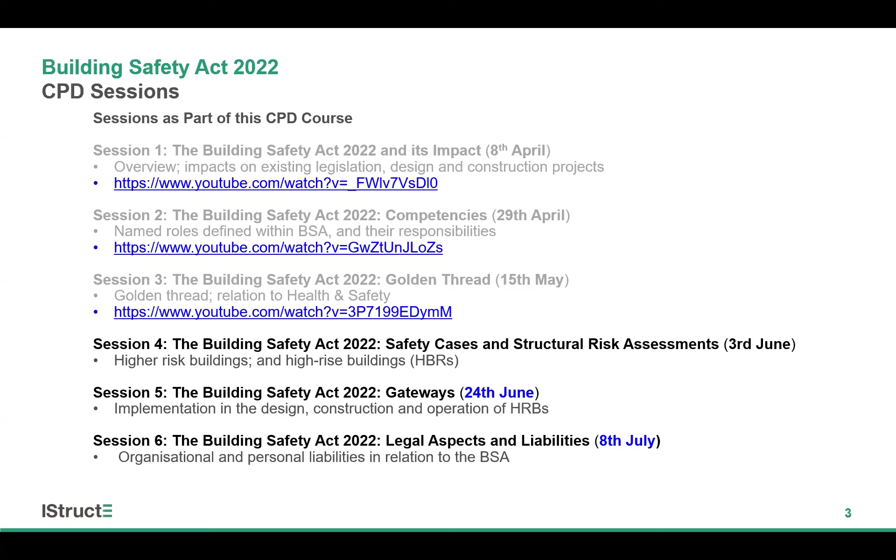Thank you. Okay, hi everyone. So my name is David Rivers. I'm a partner with Cundall. I've been working on structural risk assessments for the best part of 9 months now, so I'm going to hopefully catch you up to where we've got to in terms of understanding.

The plan for today's session: we're going to first have a general introduction. We'll cover the legislative requirements and a bit more about what the safety case report is, the bits that make it up, and what the act itself requires. I'll then give you an overview of the forthcoming IStructE Guidance on structural risk assessments, talk a bit about data gathering and how we get hold of information for desktop and visual inspection, then talk about the actual structural risk assessment process itself. There'll be hopefully a bit of time for questions at the end, although there's quite a bit to get through.

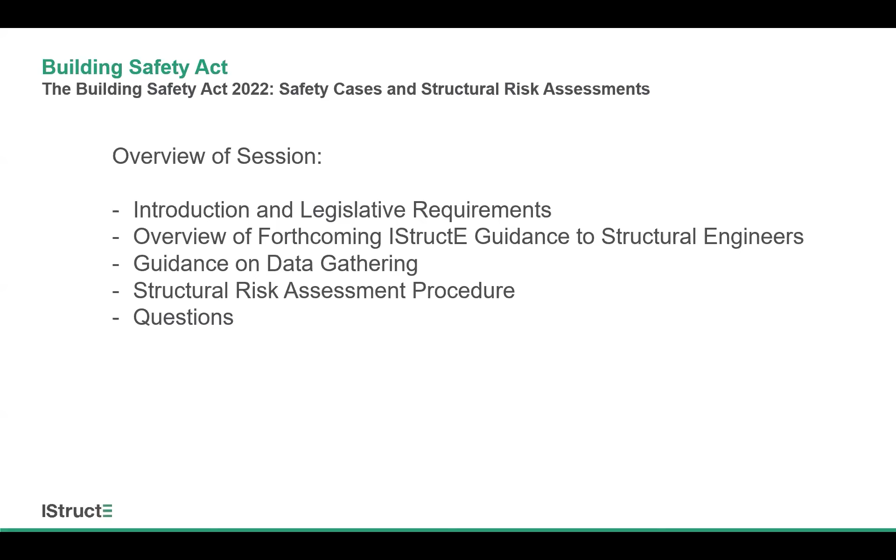So first things first, an introduction to the safety case report. The need for the safety case report and generally safety risk reporting is obviously a direct result of the Building Safety Act coming in. That mandates that for all new and existing higher risk buildings, and I'll get a bit further into what that means in practice in a couple of slides.

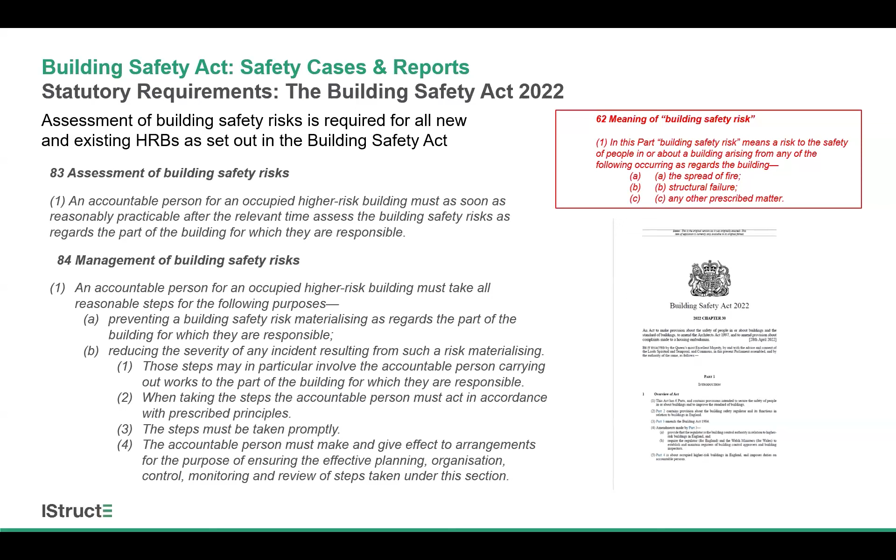For all such buildings, they need to have an assessment of their safety risks, and that's primarily from a structural and a fire perspective. The Act itself picks this up as part of clauses 83 and 84, which broadly just note that building owners need to carry out an assessment and manage safety risks on their properties.

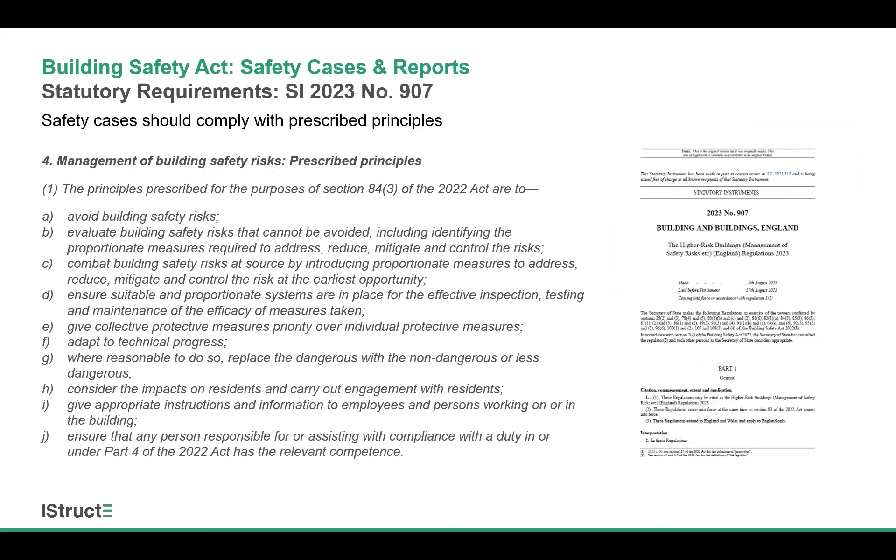It's statutory instrument 907 that more specifically elaborates as to what that means. So that sets out what it's called the prescribed principles in terms of that risk assessment process - identifying building safety risks and then managing them in a suitable way. And it's the same statutory instrument that then actually explicitly introduces the safety case report as a means to do so.

So broadly, that identifies that the person who's responsible for the building, the principal accountable person, has to work through a process to show that they understand their building and how it operates and any safety risks associated with it. That's obviously the kind of pure legislation.

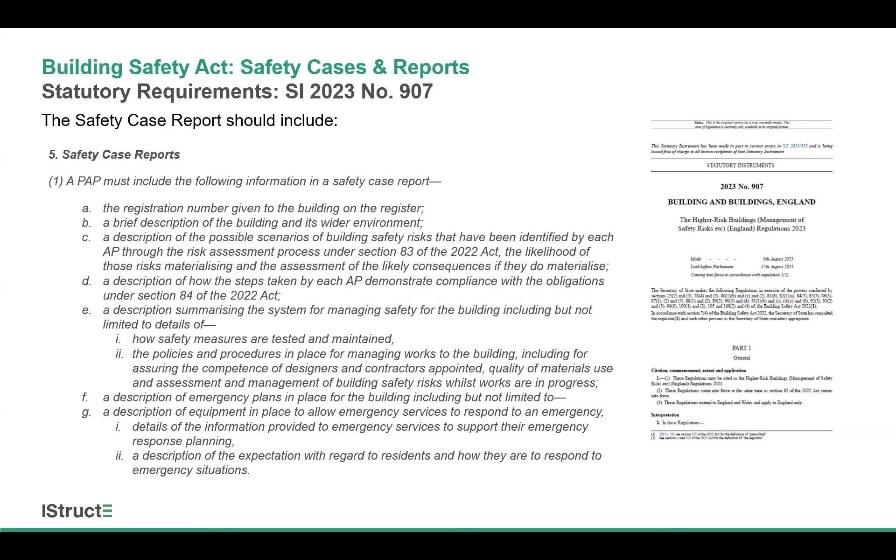What the HSE have done is on their gov.uk website, they've given a slightly more user-friendly interpretation of what actually goes into a safety case report and what principal accountable people need to do. This is as per the website reference in the bottom right. It's a very useful resource, there's a lot of content in there. I'm not going to go through all of it, but I'll pick out some key points to help set the scene and provide context as to what the safety case report is looking to achieve in a wider sense, to then help contextualize what we as structural engineers will generally need to feed into that process.

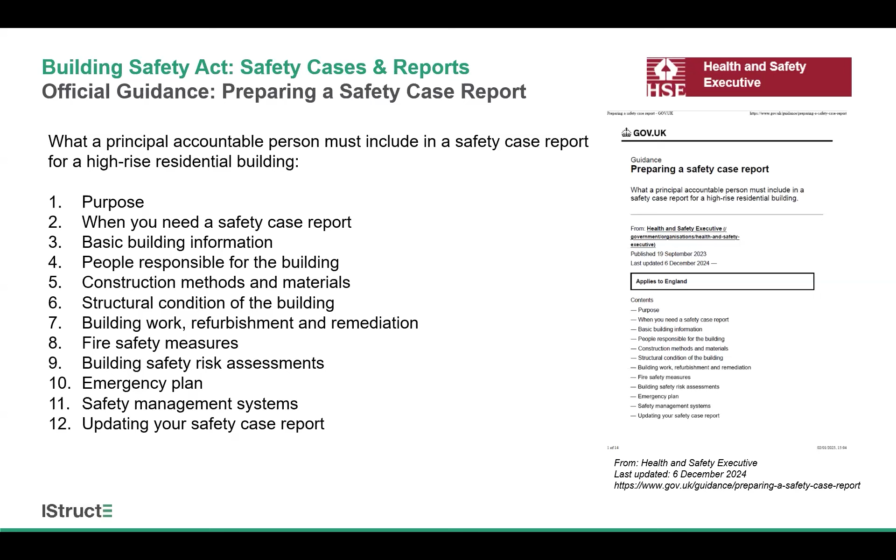First things first, the purpose of the safety case report is fundamentally to set out building safety risks associated with high-rise residential buildings and how they're managed. The definition of a high-rise building is broadly 7 stories or at least 18 meters high, and containing 2 residential units. I'll talk a bit more about that in a second. As mentioned, it's primarily looking at safety risks associated with the spread of fire or smoke and with structural failure of the building. There's obviously a degree of overlap between the two as well, which we'll talk about later.

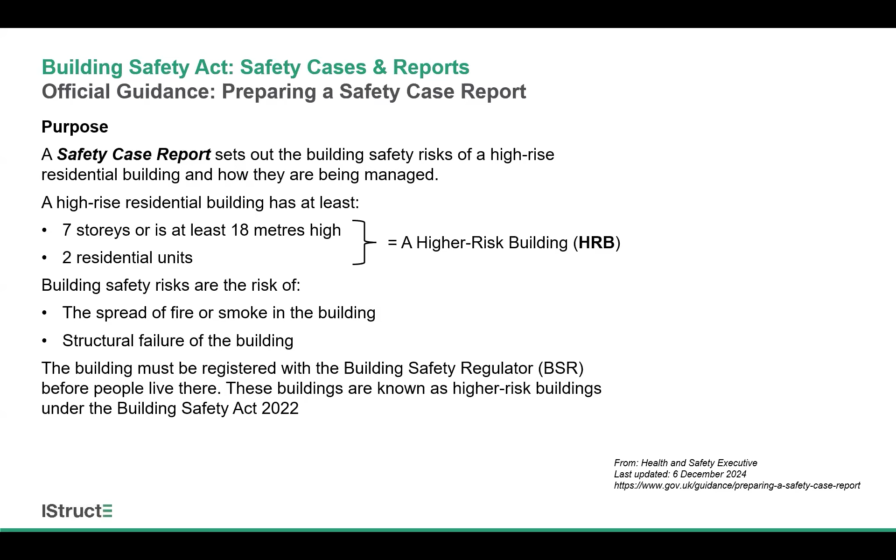Any such buildings must be registered with the building safety regulator, the BSR, before people can live there. So it applies to all buildings, even new build higher-risk buildings - before they can actually be occupied and used, they need to have a safety case in place. Obviously, the difference there is that if you've just designed and built the building, the information hopefully is readily to hand. Whereas if it's a building that was built 10, 15 years ago, that may not be quite a straightforward process.

In terms of the HRB definition, the gov.uk website that I referenced goes into an awful lot of detail to help you define what is a higher risk building, and to help principal accountable people identify whether their buildings qualify or not. In basic terms, as I mentioned, it's a 7-story building or a building that's at least 18 meters high, and that height is measured from the ground level to the top occupied floor. So if you've got a rooftop plant room or a green roof etc., that doesn't necessarily count. There are all sorts of nuances within there - if the ground level varies, or if you have local occupied rooms and things, then there's a lot more guidance on the website. Again, a good place to look if you're trying to clarify.

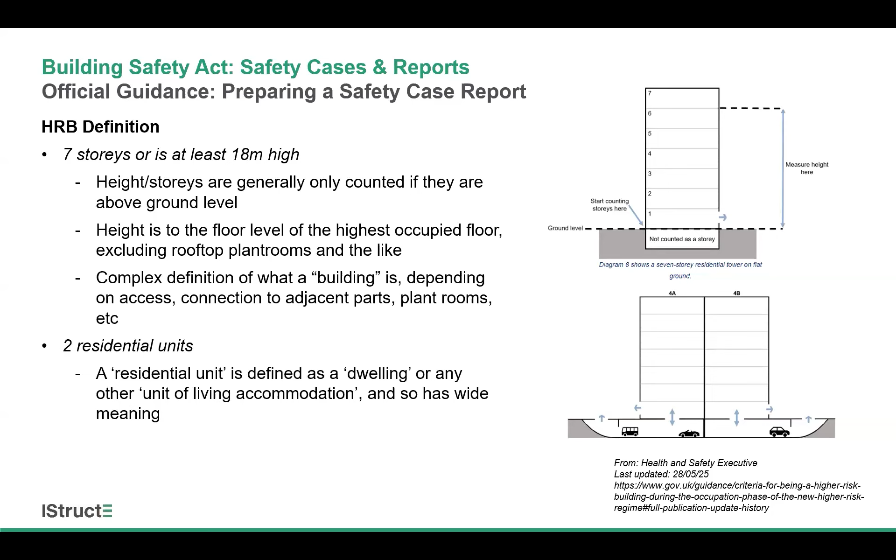In terms of the definition of a residential unit, it's I think deliberately a quite broad definition - it's a dwelling or any other unit of living accommodation. There's a bit more explanation on the website, but it's, I think, deliberately vague to make sure that more buildings are included, certainly buildings where people will be there overnight and therefore at risk of any issues occurring.

There are some exclusions that are noted explicitly within the guidance. So if the entire building is used for one of the following uses - a hospital, care home, a secure residential institution such as a prison, hotels and hostels, or military barracks - those fall outside, as long as the entirety of the building is used for that purpose. If you have, for example, a hotel where the top 2 stories are actually residential units, then that would still qualify as a high risk building.

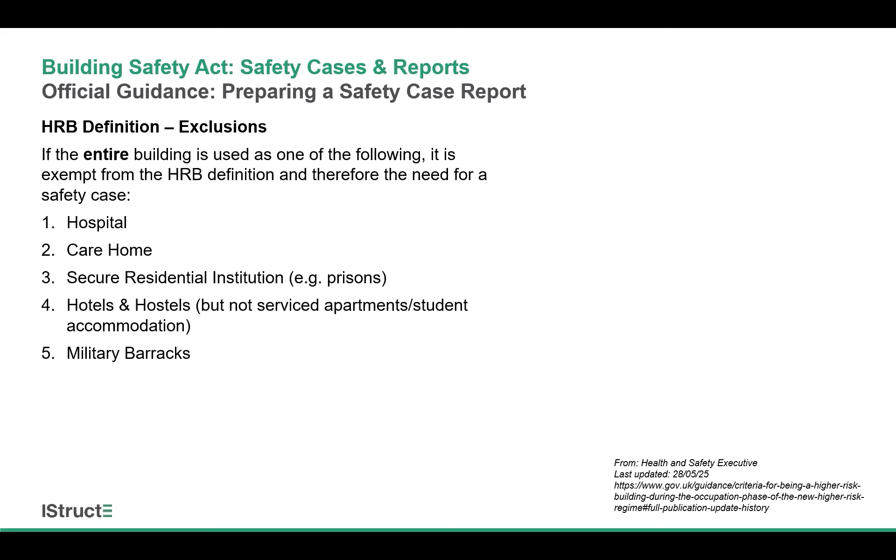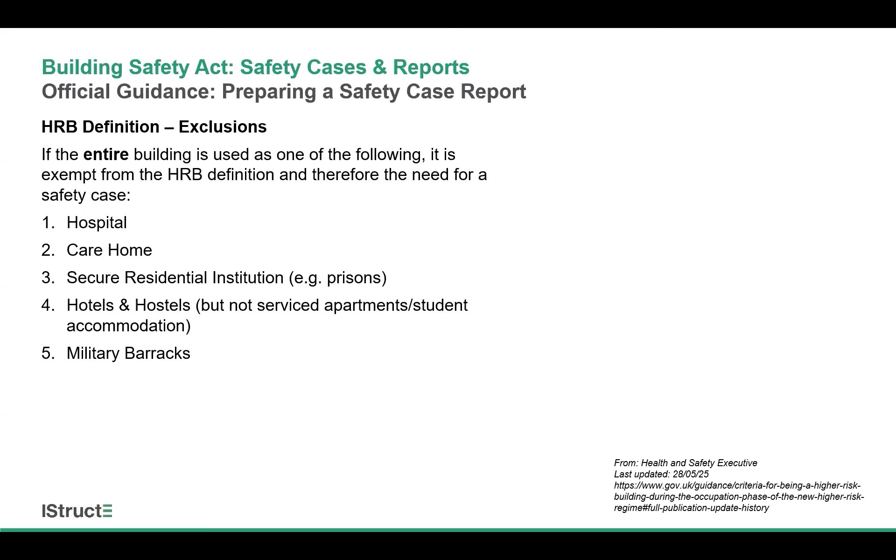Broadly, the logic is that these are kind of more actively managed facilities. So if you've got a hotel, for example, you'll have a concierge, you'll have a full evacuation plan for residents, and people obviously go to a hotel expecting there to be a fire escape strategy. If it's a prison, you'll obviously have active supervision of inmates etc. In a residential unit, because people live there, it's generally maybe a bit more free form, which I think is why those are treated differently.

When is a safety case needed? As I mentioned, that's needed from the second that a new building becomes - or before people can move into - a new high risk building. Alternatively, if it's an existing building, you need to have one as soon as the regulator calls for it, or as soon as you become the PAP if you're taking ownership of an existing building.

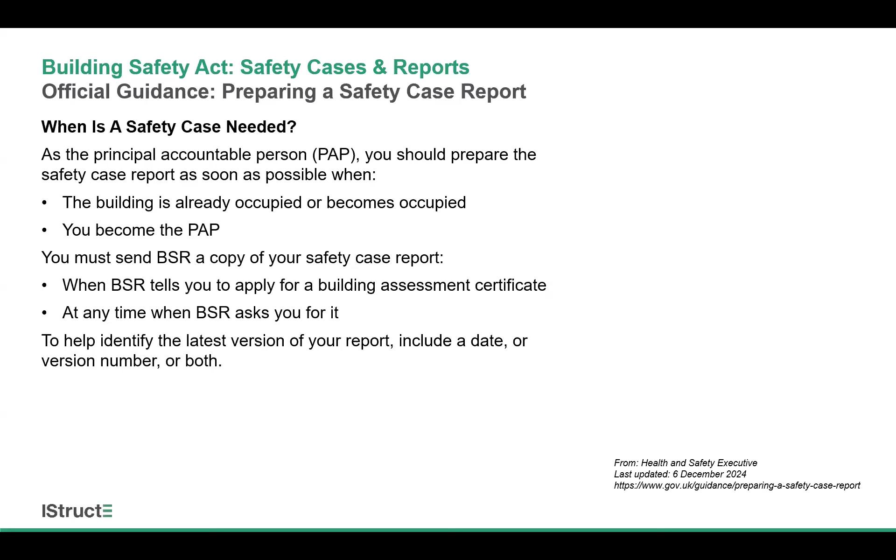The plan is that these risk assessments and safety case reports are updated on a 5-yearly basis, is the current plan. So it's an ongoing maintenance and update process through the life of the building.

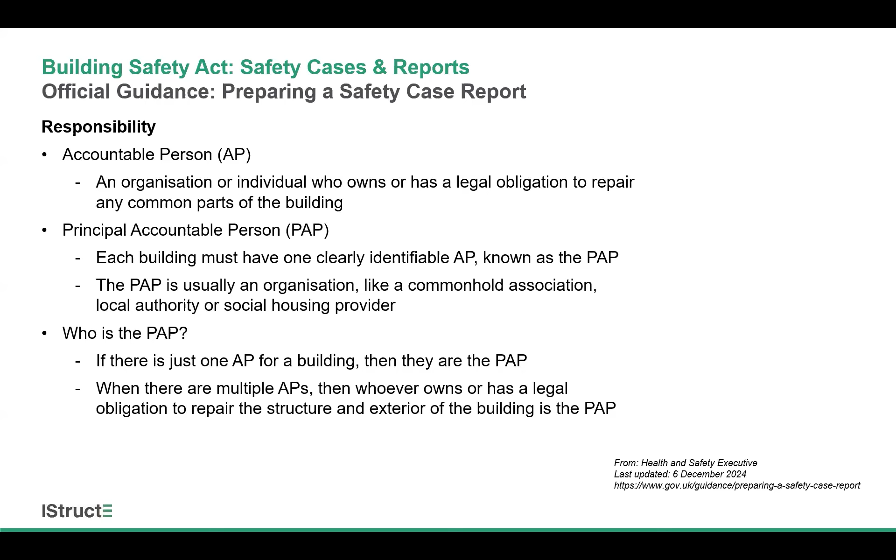I've mentioned principal accountable persons already. Broadly speaking, any accountable person is someone who has a legal obligation to repair or look after a part of the building. The principal accountable person is the overriding person in control. It's usually an organisation, like a commonhold association or a local authority, and they take ultimate responsibility for pulling together the safety case report. They aren't necessarily responsible for producing every single aspect of it, but it's their global responsibility to assemble and submit the safety case and to register the building.

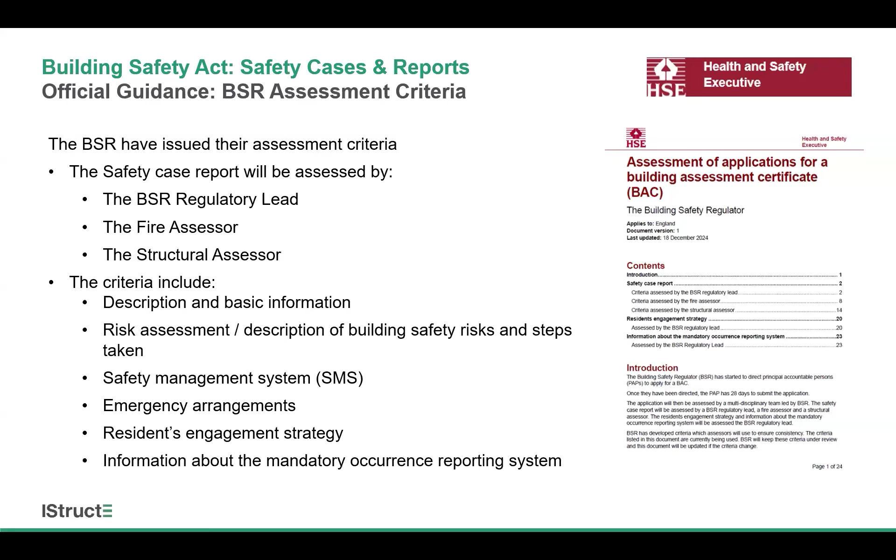As a final introductory note, the BSR relatively recently have published their review criteria that they use for the safety case report reviewing. It's effectively a series of tables that show the areas they're looking for and the questions they're trying to answer. It's quite useful in helping to structure what they're looking for and what level of detail they need. That guidance will continue to evolve over time as they review a larger number of safety case reports and start to find common issues and questions.

Okay, so that kind of sets the scene more from a global safety case report perspective. The remainder of the presentation will focus more specifically on the role of structural engineers and how we feed into that process. I'll start by giving you a quick overview of forthcoming guidance from the IStructE.

So this document, preparing safety case reports, is currently going through final draft and review. The intention currently is for it to be issued in August, and it effectively is the IStructE's perspective on what structural engineers need to do to feed into safety case reports. Normally guidance is based on standards and accepted best practice, but this is all fairly unprecedented in the context of engineering, so it's had a fairly complex development process.

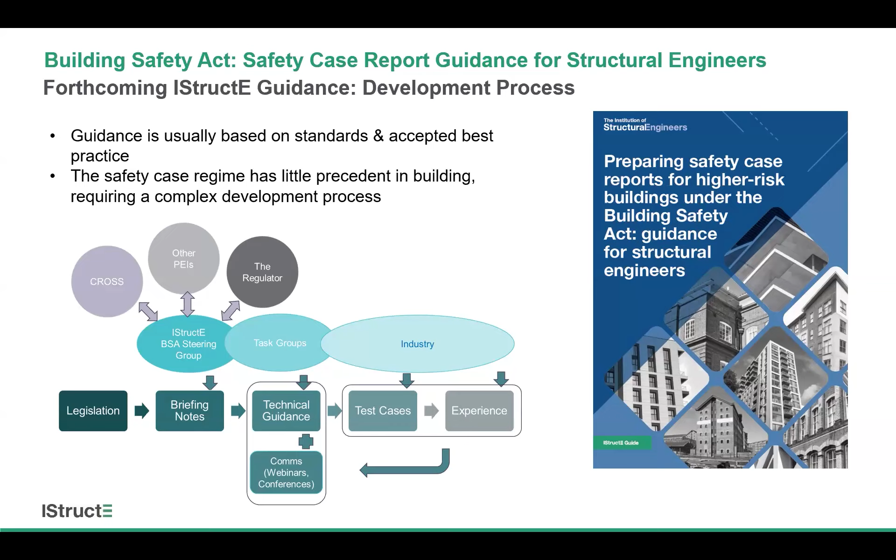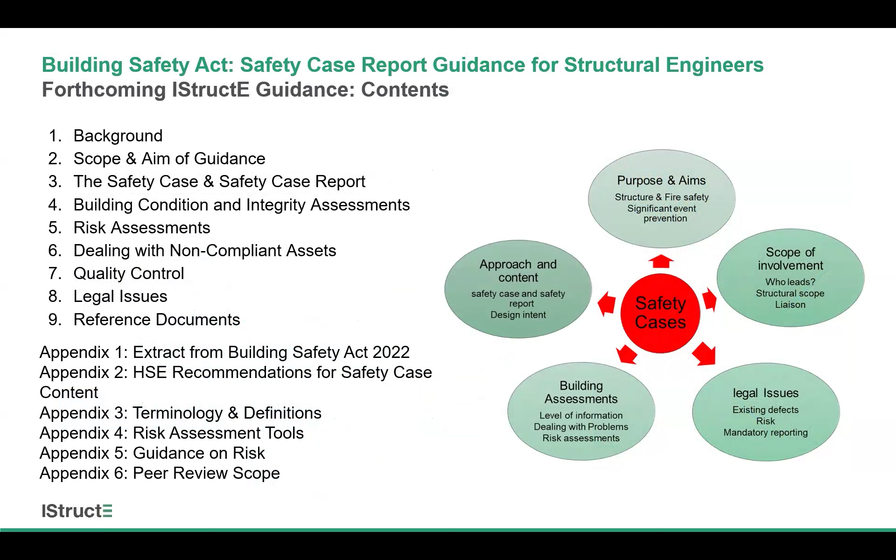There's been various groups feeding in, technical guidance from relevant people, feedback from the industry and the regulator directly as well. So it's been very much a group effort, and it's taken a fair bit of time to pull those various strands together. But the intention is that it will act as a one-stop shop to help steer the process for structural engineers. The document itself works through a logical process of the different steps of that safety case assessment procedure. We will cover a number of these in the coming slides, but this gives you an overview of what's going to be in there.

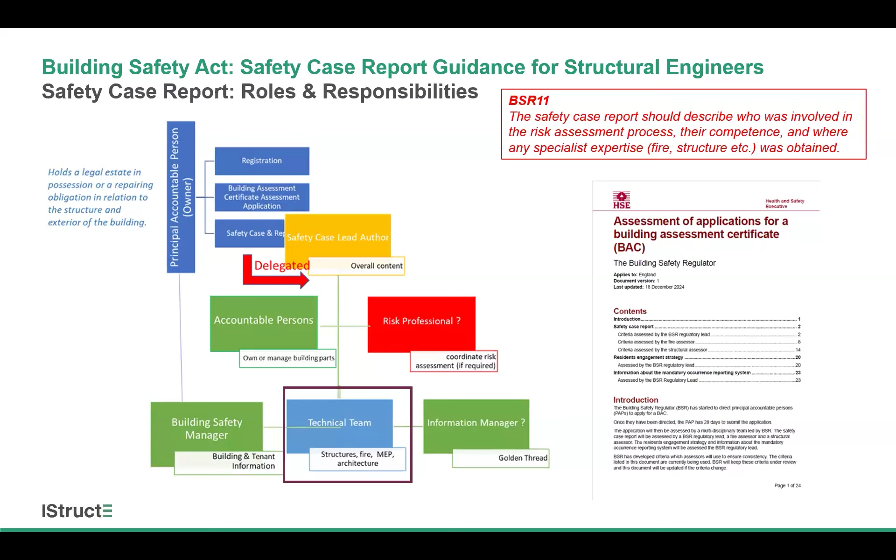In terms of roles and responsibilities, as I've already alluded to, there's a whole number of people who feed into the wider safety case reporting. From a structural engineering perspective, it's generally this purple box at the bottom, the technical team - that's where we will feed in. As mentioned, it's the principal accountable person who is ultimately responsible for putting all of this information together and coordinating the team, and we, as structural engineers, will be providing our information to them.

In terms of what that information would look like, the primary element is the structural risk assessment itself, which I'll talk about further, but there's various other input across the board that will feed both into that risk assessment and more generally into the safety case report. So we have quite a few things to think about, but they all fall under the same general review and assessment process.

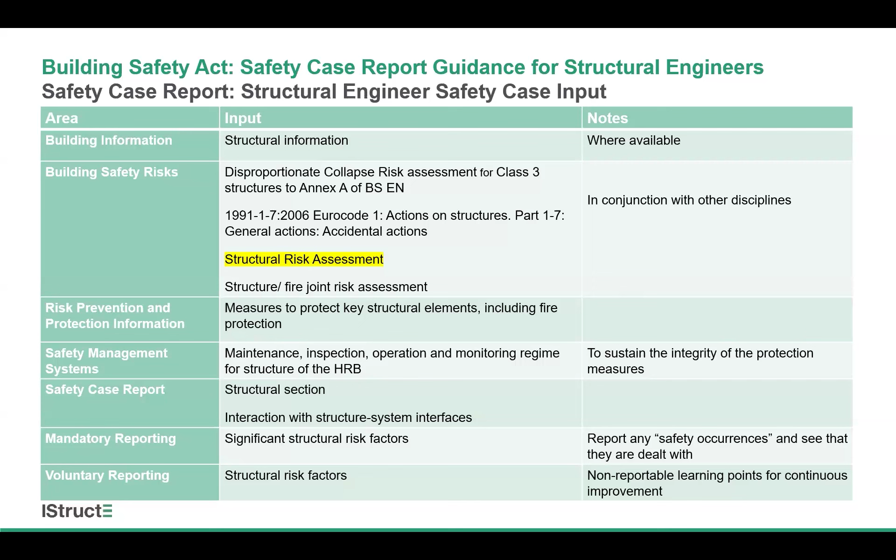The IStructE guidance itself is informed by a number of existing documents - you've got various documents around assessment of existing structures, structural risk assessments for consequence class 3 buildings, structural robustness, etc. So it's putting together a lot of existing pieces of information into a new focus that hasn't really existed previously.

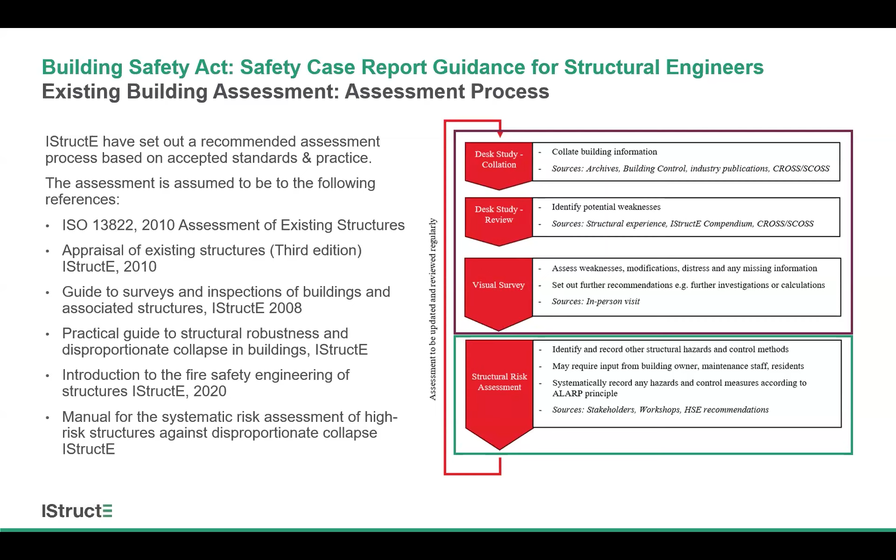And just as a final note on the guidance, this isn't a formal part of the actual BSA itself, but it's something the IStructE has used to help categorize and inform the risk assessment process. So if you're looking at an HRB, it's broadly dividing it into one of two categories. If it's a category A building, it's generally a new build or a newer building where there's readily available record information, design intent, calculations - all of the thinking and knowledge that's gone into it is readily available and to hand. Effectively, they're the easy ones that hopefully have all been designed properly and fully thought about.

We typically have gone through the gateway process, certainly from now moving forwards. The majority, at this point, will fall into category B, which are generally older buildings that may have incomplete building information. They might have been through refurbishment or upgrades, or be nearing the end of their normal useful design life, so generally require a more involved and considered risk assessment process. Category A and category B aren't something that actually exists within the Act itself, it's just a framework that the IStructE has adopted. What I'll largely be talking about in the coming sections is geared around category B buildings.

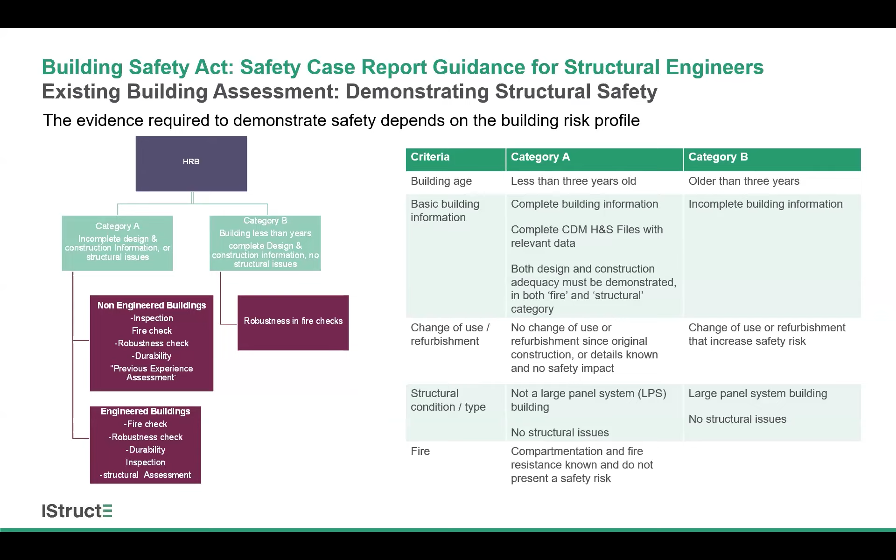So first things first, some advice on data gathering. One of the key parts of the legislation is that the regulator's been very keen to emphasize that a proportionate approach is needed when carrying out these assessments. It's not particularly explicit as to what proportionate means, but in terms of the work we've been doing and the interpretations we've made...

Effectively it's primarily a desktop and visual survey, at least initially. So it will involve going through record drawings and doing site inspections to review the general form and layout of the building. Does it look sensible? Are the column grids appropriate? Are the stability elements in the right place? Do the member sizes look about right? There'll be an element of site inspection to look for any signs of distress or movement or anything that might prompt concern.

Particularly if there are elements that appear to be undersized and maybe we don't have calculations to show that a transfer beam has been designed to work at a certain depth, and just a trained eye looking at the drawing, the beam looks smaller than it should be, or the transfer slab looks smaller than it should be, then you would go into a more detailed review and assessment. The theory is that you're not necessarily looking for problems, you're just trying to make sure the building makes sense and is logical. Obviously the more information available, the easier it is to do that, and if there are gaps, you might need to fill them in due course.

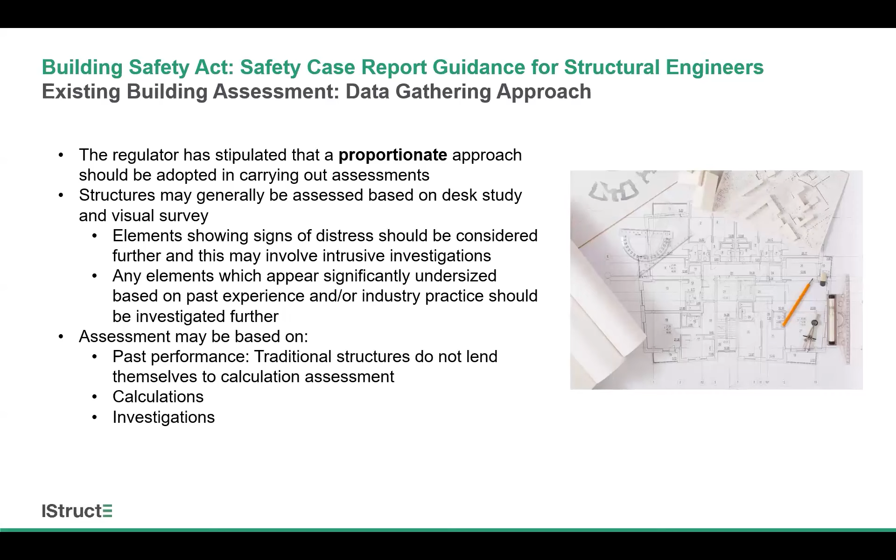The assessment approach itself can vary depending on the nature of the building. It could be based on past performance, particularly for quite old buildings that predate more modern design codes and wouldn't necessarily lend themselves to a traditional calculation approach. So it might be a degree of looking at past performance in similar buildings and generally their condition. It could feasibly be based on calculations or spot checks and review, scheme design guidance, etc, and also to some degree on investigations and further review. But I'll talk about all of that in subsequent slides.

Starting from a desk study basis, there are various sources of information you're going to get your information from. The number one source is going to be the record information. As per the previous session on the golden thread, hopefully the principal accountable person will have a full set of information relating to both the original design of the building and its ongoing use and operation. That would hopefully include structural drawings, maybe reinforcement or fabrication drawings depending on the materials used, drawings for other disciplines such as architectural plans, building services plans with services provision, particularly things like gas, and any services that may run underneath the building.

It might include specifications, testing data from construction such as concrete cube strengths. Ideally, although we haven't really had any of these, calculations, or more likely you might find design philosophy statements where at least you have some clarity as to the basis of the original design. Things like ground investigation reports that might highlight particular concerns around aggressive ground or settlement, etc, and then fire strategy and compartmentation drawings, which will obviously be relevant from a structural fire resistance perspective.

On top of that, there are a number of broader documents very helpful in informing that risk assessment procedure. There are various IStructE documents, which I'll talk about with some other examples, plus the forthcoming code document I've mentioned. Historic design codes are very helpful, particularly if you know when the building was built, you can have a decent stab at what the overriding design requirements would have been at the time, and can review against that in terms of element sizes or fire resistance of members.

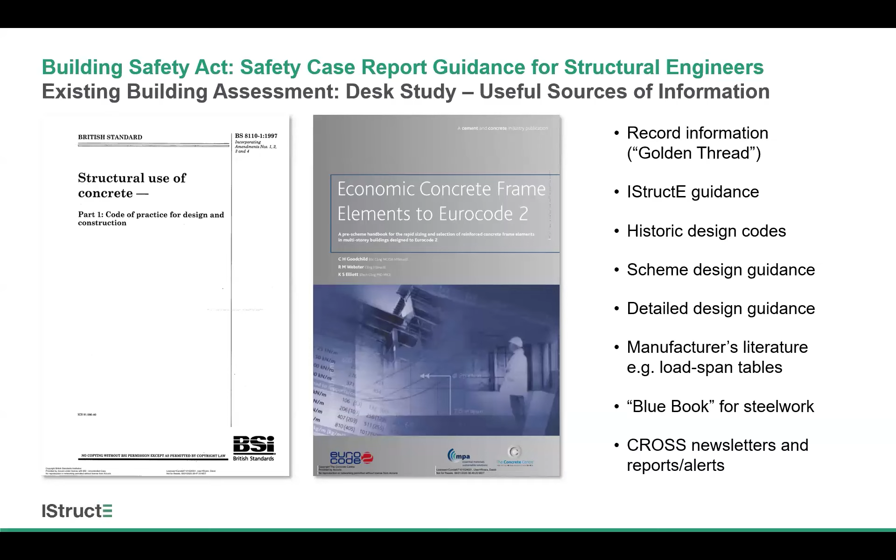Something that's been mentioned before and published more widely: IStructE have compiled a compendium of common types of higher risk buildings. This document is available on the IStructE website, and gives general steer on typical forms of building based on age and visual condition, helping identify common issues you might want to look for, as well as giving you a fighting chance of understanding how certain buildings work, which can be difficult when record information is scarce and partitions and finishes hide the structure's form. It's definitely a starting point - I don't think you could rely solely on the steer from this document, but it might help give you at least a starting point as to what you need to look for.

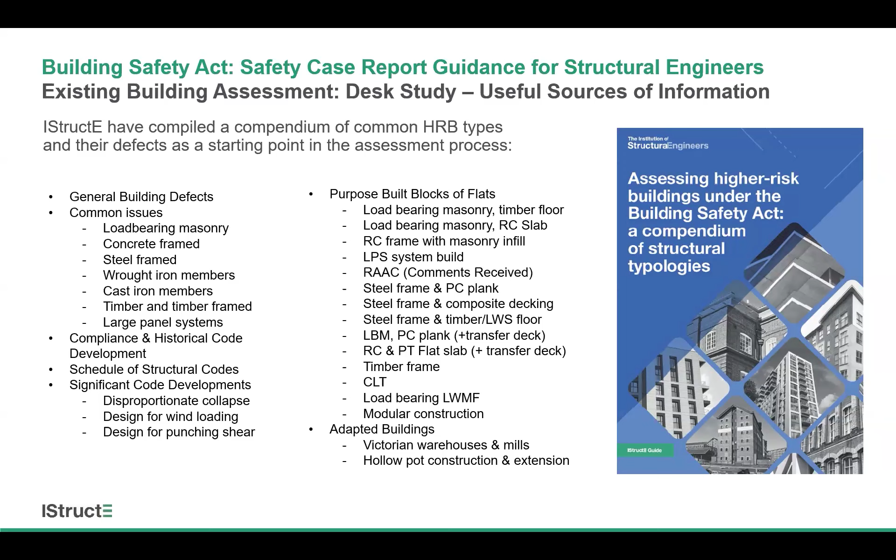Other useful sources of information: Technical Report 70 is very helpful, which talks about the evolution of concrete design through the years, and can help steer you to the appropriate design codes that would have been in place at the time of construction, informing your review.

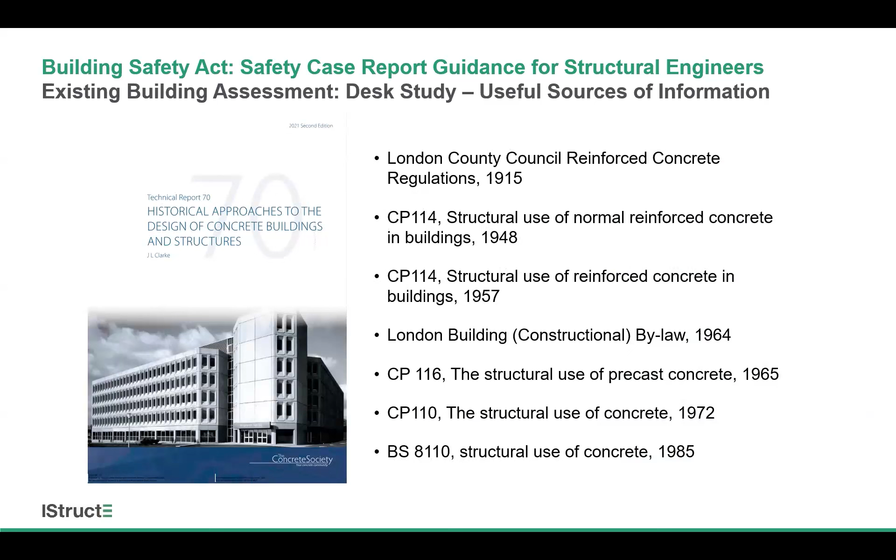Other documents include the recently issued guidance on transfer slabs, which includes scheme design rules of thumb for how thick a transfer slab would need to be for different numbers of stories - quite useful during your initial desktop study to check if sizes seem about right. There's also guidance around finite element analysis, concrete, and fire safety. Bits of that might be appropriate depending on the nature of your assessment and what you find, and if there are areas of concern, it may prompt a more detailed review.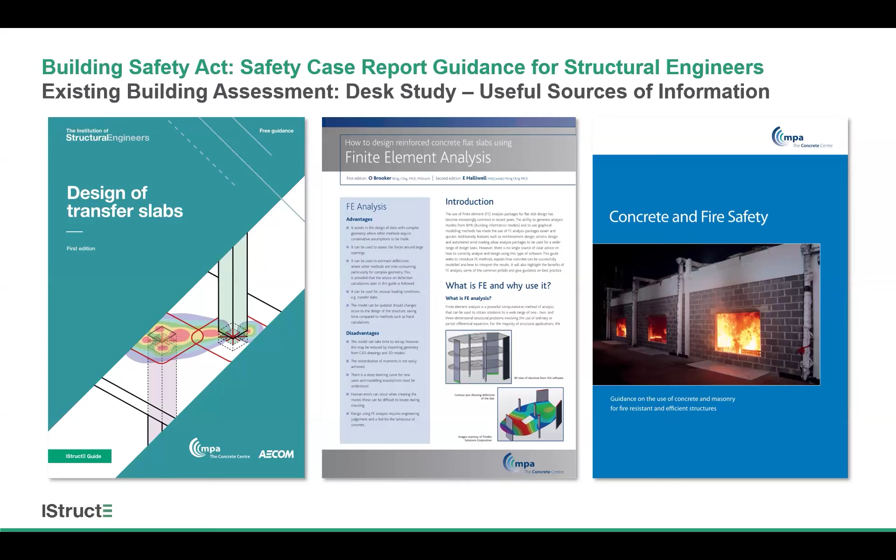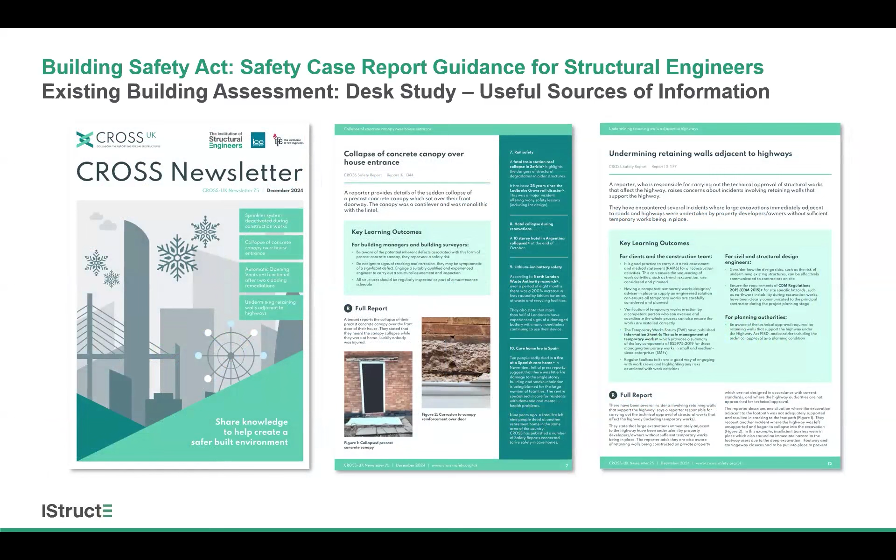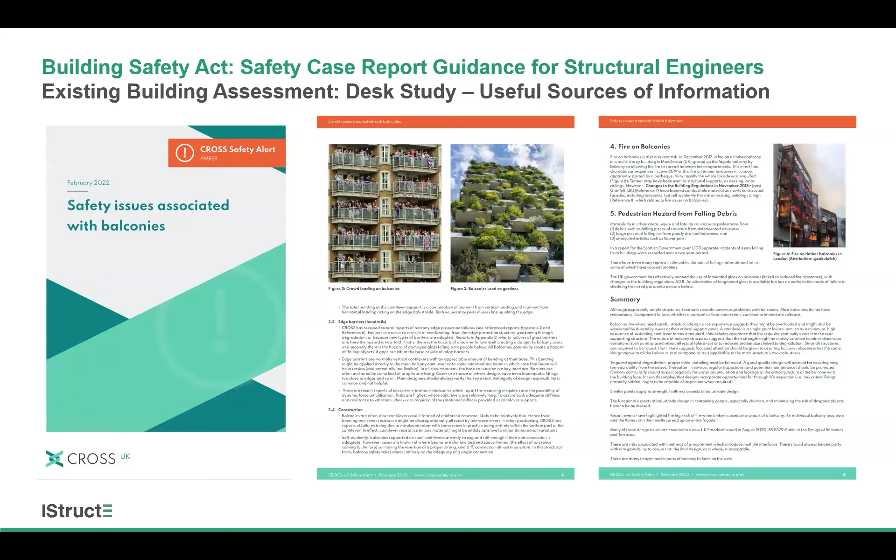I mentioned the CROSS newsletters - these are effectively a prerequisite for anyone doing anything to do with the Building Safety Act, which is effectively all of us. They're very good at highlighting common issues and concerns. Not everything will be directly relevant to a structural risk assessment you're doing, but there are things in here around balconies, transfer slabs, and various common issues well worth being aware of. That's true of the safety alerts as well, which highlight specific concerns. I'd definitely recommend staying on top of these and being signed up.

Following the initial desktop review, it's generally sensible to do a site inspection of the building before getting into any risk assessment. You can learn a lot from a building from the drawings and any record information available, but until you've seen it in person, you don't have the full picture.

Typically, at least initially, the site inspection will be non-intrusive and visual, limited to readily accessible areas - common areas such as receptions, corridors, stairwells, plant rooms, car park areas, maybe retail properties if used at ground level. In some cases you'll have accessible rooftops, and in many apartment blocks you'll have podium areas with landscaping. You'll generally have access around the building perimeter, allowing you to look at balconies, for example, and get a feel for their form - are there any obvious signs of corrosion, etc.

Typically the residential units will be off limits because they're occupied, and that tends to make up a large proportion of the building, so that's often a challenge. Even where you do have access, often it's hidden behind finishes. So it's naturally a limited exercise, but you can glean quite a lot from a thorough investigation of the areas you can get to.

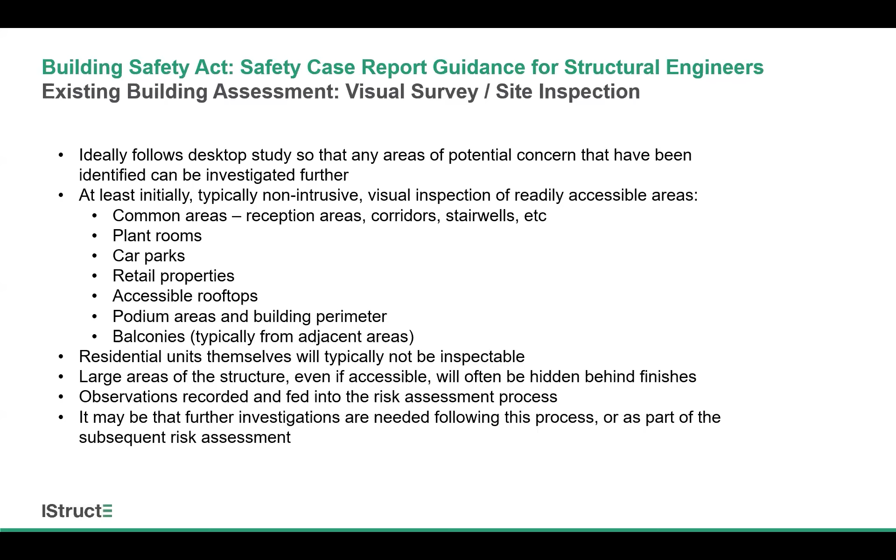The observations from this are then fed back into the risk assessment process. So you've got your desktop study and your site inspection observations, and the two of those together go directly into the risk assessment process. It may be that you need further assessment as a result of that process and things that come out of it, but at least initially, generally a visual inspection is an appropriate level of information to feed into the review.

The challenge, obviously, is that even with all of that, you will often still find that you have missing information, and so there might be a need for further investigations to inform that. It's a statutory requirement to actually gather the information on the building and its structure, and as part of the risk assessment process, you do have to effectively show your working and show what documents you've used to inform your review, and those documents are generally included in the safety case report as an appendix so that the regulator has full visibility of what you've seen. What we have certainly found in the assessments that we've done is that generally you won't have all of the information, and there can be significant gaps, even for newer buildings where you might expect that modern best practice would help to ensure that information is available.

You might therefore find the need to do further investigations. As a worst case, that might be on a larger scale opening up. So if you've got no record drawings of the building at all, and you can't even definitively know what material it's made from or where the columns or the cores are, you might need to do some more deliberate opening up of partitions and things to try and get a feel for the frame of the building. Hopefully, more generally, it will be targeted investigation. So, for example, you might be doing cover meter surveys to try and review the cover to concrete elements from a fire or a durability perspective. You might want to do local testing of intumescent paint to confirm its fire resistance, maybe testing for the thickness of concrete slabs, for example, if that isn't really available from the information that you have.

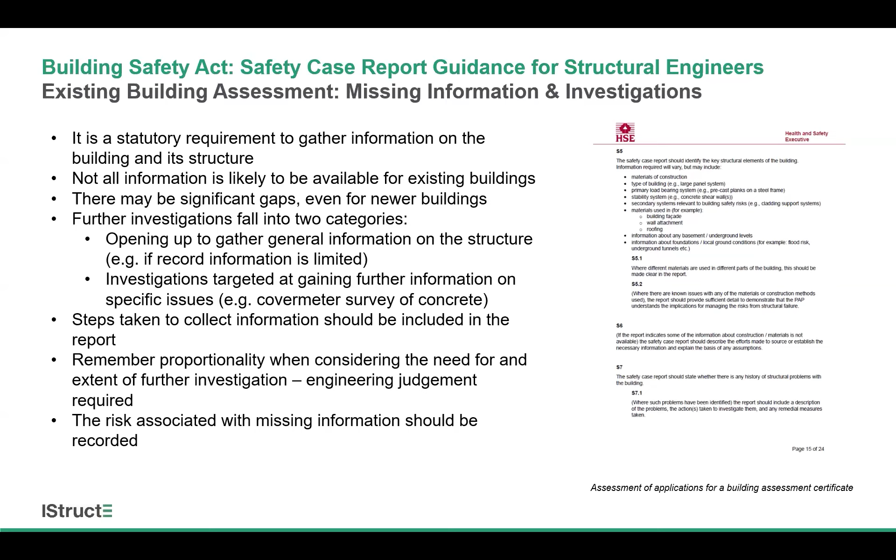If there is still missing information as well, then any risk associated with that should be recorded. So if you are saying, we've done some investigation, we've reviewed a number of positions, generally these suggest that something is okay, you then can make the point that we haven't tested every location, we are extrapolating from that data, but it's all about just being transparent about what has and hasn't been done. So that's the data gathering process.

And once you've done all of that review, you have all that information that then feeds directly into the risk assessment procedure itself. As a general overview, the risk assessment is looking to identify structural and fire risks within the building that you're looking at, assessing the likelihood and the consequence of the risks as a result, and then identifying if steps need to be taken to mitigate those risks. So it's broadly the same as any other risk assessment that we might do.

The BSA doesn't dictate a particular form of risk assessment, just that it's fit for purpose and that it matches the risk profile of the building. There are various ways that this can be done, and I'll come on to that. Typical outline processes are shown here from BS EN IEC. Broadly speaking, you're identifying hazards, you're doing an analysis as to the kind of risk associated with them and the consequences thereof, and evaluating them, and then working out whether you need to do anything with them. So it's a standard process, but it's a new way of applying it to what maybe we're used to as engineers.

There's specific guidance within HSE report RR1170, which gives some steer as to what the different risk scenarios are for both structural issues and fire issues. From a purely structural perspective, it's fairly intuitive - collapse of various levels. You might have collapse of local areas through to collapse of multiple floors, through to the whole building collapsing. There's specific concern around balconies or suspended walkways and making sure those are suitably addressed.

Any attached or supported components, so that might be large awnings or balustrades or handrails that provide a key safety issue, both in terms of them falling and landing on people, or residents being at risk from those failing and people falling over the edge. There's specific concern around undermining or compromise of foundations and whether any works around the building might have an impact on its overall structural integrity.

Aggressive conditions due to the ground or the environment or general degradation processes that can impact the building. Specific incidents, so that could be things like gas explosion, vehicle impact, potentially depending on the building, it could even be things like train impact or other local considerations. And then scenarios around how the building was built - the most obvious one is large panel systems, like the Ronan Point kind of scenario where you've got a particularly dangerous failure mode if things go wrong. But you might have buildings built out of precast elements, and making sure that they've all been joined together in suitable ways.

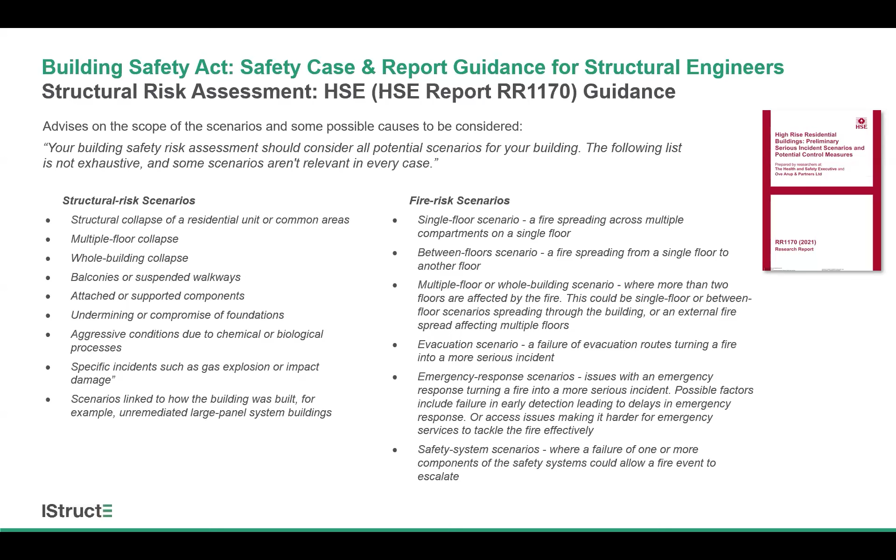In terms of the hazard identification process, there's an example checklist in the IStructE Guidance that's coming. This is a snippet from that, so it identifies some of the common areas that you might want to think about - the nature of the design, the nature of the building in terms of its general form, whether there's anything particularly innovative or unusual around it, things like transfer slabs or cantilevers, that kind of thing. Thinking about different types of actions, the condition of the building, any observations, etc.

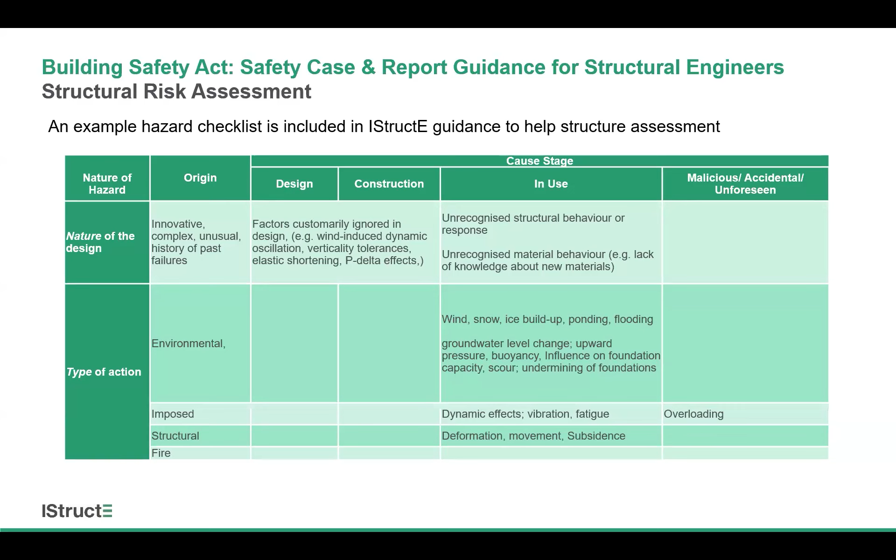There's no mandatory way to record this. The IStructE guidance is there if you want to use that. Alternatively, as long as you're going through a rigorous, systematic procedure to identify any hazards, that's ultimately the key thing here. And again, it's important that you record your working as part of the risk assessment process so the BSR can see how you've gone about identifying those hazards.

That then feeds into the actual hazard analysis itself. As I mentioned, there's no specifically mandated approach to this within the Building Safety Act. What they do say is the HAZID methodology is a straightforward approach that may be suitable, and then they go into some detail elaborating as to what that might look like. So although they're not saying use a HAZID analysis, they do steer you in that direction. But there are other approaches that could be used - bow tie analysis is another way of doing it.

Broadly speaking, as long as you're going through a process where you're reviewing the hazards and effectively saying, what if this occurs, what would the consequences be, and then assessing the process as to the consequence of those and how those could be mitigated, that's fundamentally what the approach is looking for.

The key thing with whichever approach you adopt is that there is sufficient independence as part of that review. So it's not a case that you've got a group of people who know the building well and are unconsciously going down a blinkered approach where everything seems fine. You need to make sure you have people with sufficient independence that they can ask questions and think about things differently to make sure that you are identifying those issues.

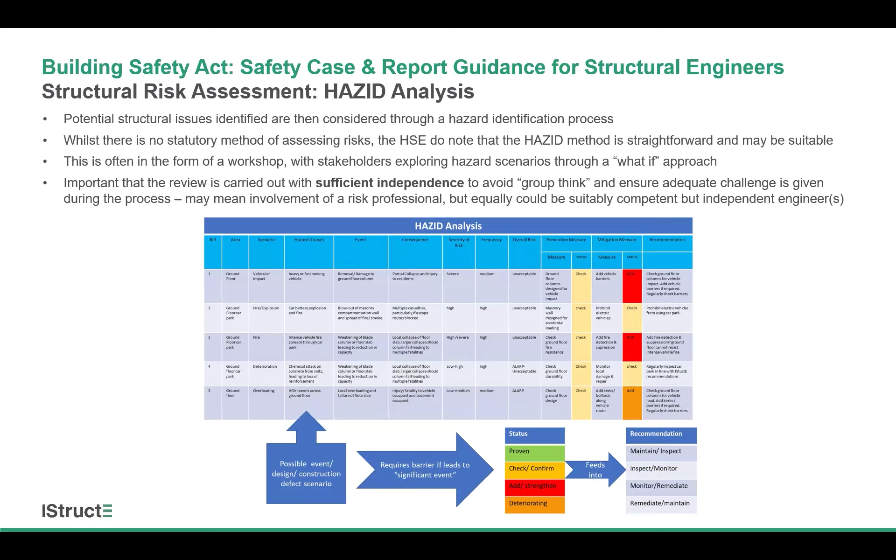That might be a kind of risk professional, depending on the nature of the building and the availability, but it could equally be a suitably competent engineer who's just there to challenge and ask the right questions to help steer that process. However you go about that process, it's captured as part of a HAZID analysis. You need to effectively set out what the hazards are, the thought process that's gone around the review of the risk and the consequences thereof, and then you ultimately would capture any mitigations that are needed.

A few examples of items that might be particularly relevant as far as the hazard review is concerned. These are all things we've found as part of the assessments we've done so far. I won't go through the full list, but the bigger ones tend to be things like transfer slabs or transfer beams and making sure they're appropriately sized. We've had some cases where they've been much smaller than the scheme design guidance might suggest they should be.

Large panel systems are a particular challenge, and there's obviously been specific talks on that by the IStructE, going through some of the particular complexities around those buildings. There aren't a huge number of them in the grand scheme of things, but they do bring particular challenges.

Other things - concrete cover and element sizes, particularly from a fire resistance perspective, is a recurring theme. There's minimum element guidance given in BS 8110, for example, and if the columns and cover are compliant with that, in theory that's nice and straightforward, but we're finding that's often not the case, and there's a reliance on compartment walls that are often not of the same rating as the structural resistance, so there's still some ongoing review as to what that means.

Other things - column discontinuity is a common one, where you might have columns moving on plan, columns rotating on plan, or walking as you go up the building, which would obviously be a particular concern to make sure they've been designed properly.

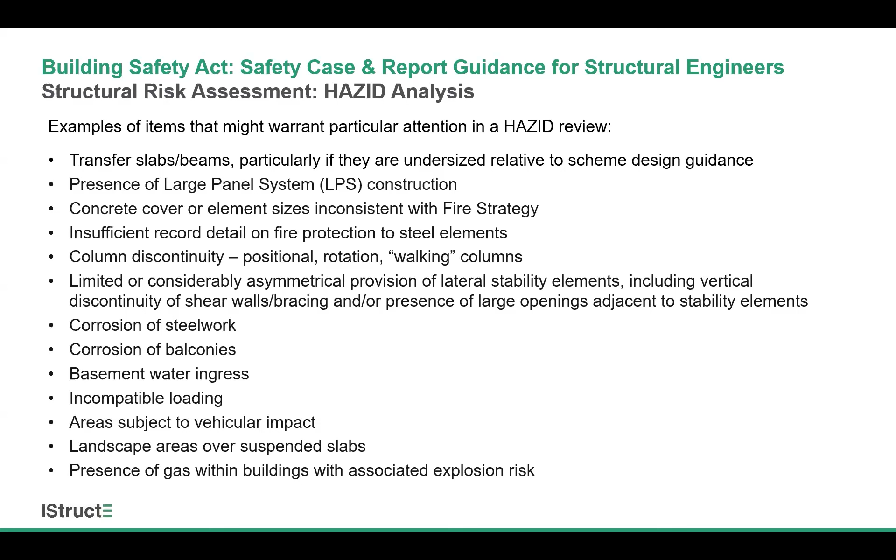Another key one is around vehicular impacts. Often you have car parks at the base of large multi-story buildings, so it's making sure suitable allowance and consideration is given to the potential for vehicle impact. It might be through direct prevention - columns being designed appropriately or having vehicle barriers - or it may be done more through general robustness and tying perspective. However it's been thought about, it's just trying to make sure it's been suitably managed.

One of the explicit requirements of Statutory Instrument 907 is that, as well as identifying and reviewing hazards, you have to actually quantify them from a likelihood and consequence perspective, similar to most other risk assessments. The challenge is there's not really any reliable statistics as of yet to help inform likelihood of something occurring - fortunately there's a limited number of big failures in buildings, certainly in the UK.

As a result, it tends to be more of a qualitative process than a quantitative one. It's really about using your engineering expertise and judgment to decide whether a risk is unacceptable and needs to be actively addressed in some way, whether it's generally acceptable and fine, or whether it falls into the middle area where you maybe can't definitively say it's not a problem, but in the general balance of things, the risk is as low as reasonably practicable.

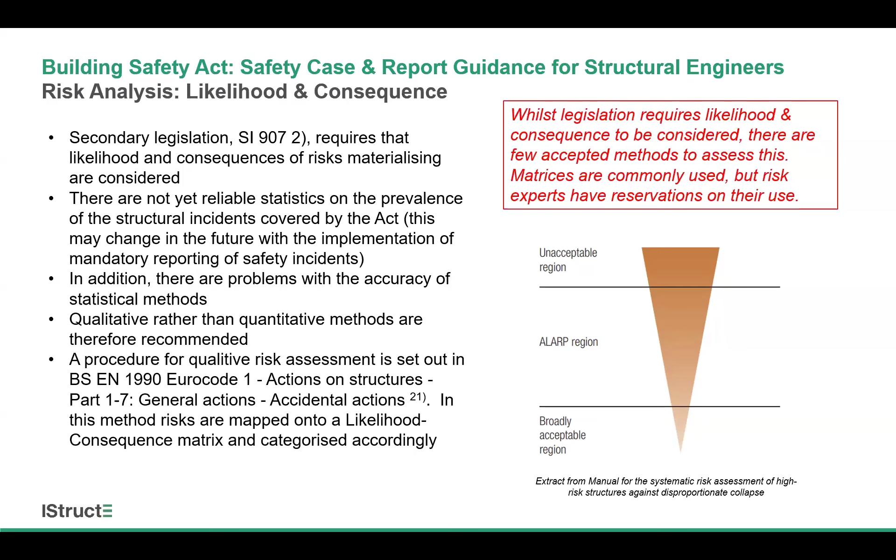There's an example within the IStructE Guidance around that kind of risk scoring. You have the green zone at the bottom, where you've got generally tolerable items that are okay. The red area at the top right, where you've generally got a concern that needs to be addressed in one way or another. Then there's a band in the middle where all reasonable steps that can be taken have been taken, and generally the item is deemed okay on balance. But this is the tricky bit as engineers, because we're dealing with uncertainty, and how we manage and justify that is really the crux of this whole exercise.

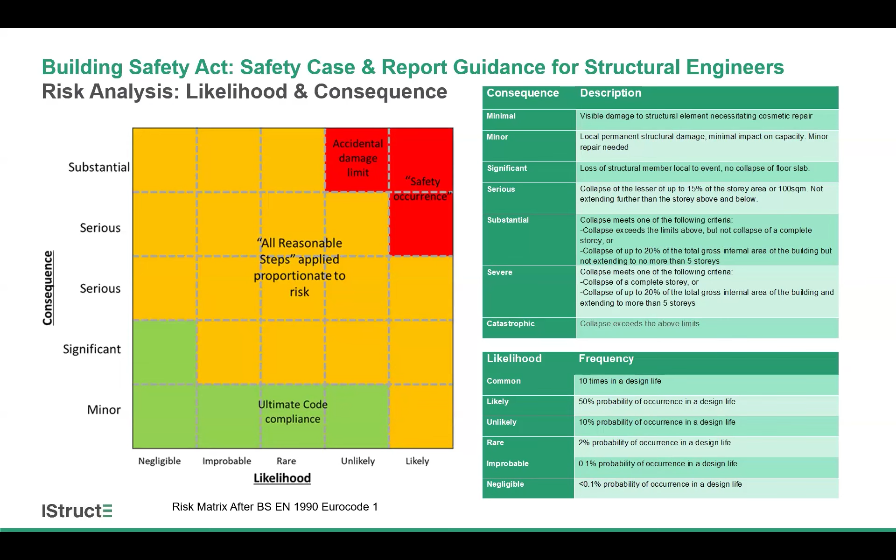In terms of the actual risk scoring, the likelihood is the trickier bit. The consequences is obviously a little bit easier for us to think about. This is kind of consistent with what you would do on a consequence class 3 risk assessment, where you can have a reasonable stab at, if a column were to fail, what would the consequence be? Will it be localized to a certain area, or will it actually affect a large portion of the building? So this guidance is more or less verbatim with the consequence class 3 risk assessment guidance.

So once you've been through that process, obviously the best case scenario is that you've managed to satisfy yourselves that everything is tolerable or ALARP and that there's no further areas of concern. However, that's not always the case.

So in the event of identifying any non-compliant assets, that might be elements within a building, or it could be the whole building itself, depending on how severe the item you flagged are. There's then a whole sort of follow-up process of further investigation, further review. There's different ways of dealing with that.

So it might be that it's a series of more detailed analysis. You might then go to finite element assessment or more complicated calculation to either try and prove that something does actually work. If it's, say, a member that's smaller than you might expect it to be, it might work perfectly fine if you do the more detailed investigation.

But again, it's this proportionate approach - making sure that you don't go straight to building a finite element analysis model of the building on day one. It's more working through the process. And if you get to the point where you've got questions that you can only answer by doing a more detailed analysis, that's where it becomes proportionate.

Alternatively, this is obviously all based around risk, so the other way of viewing it is, how can you control the hazard in a different way? So if the concern is that a particular column is sensitive to vehicle impact, rather than trying to redesign and assess that column, you could potentially introduce some sort of vehicle barrier or other method of preventing that column from being subject to the vehicle impact in the first place.

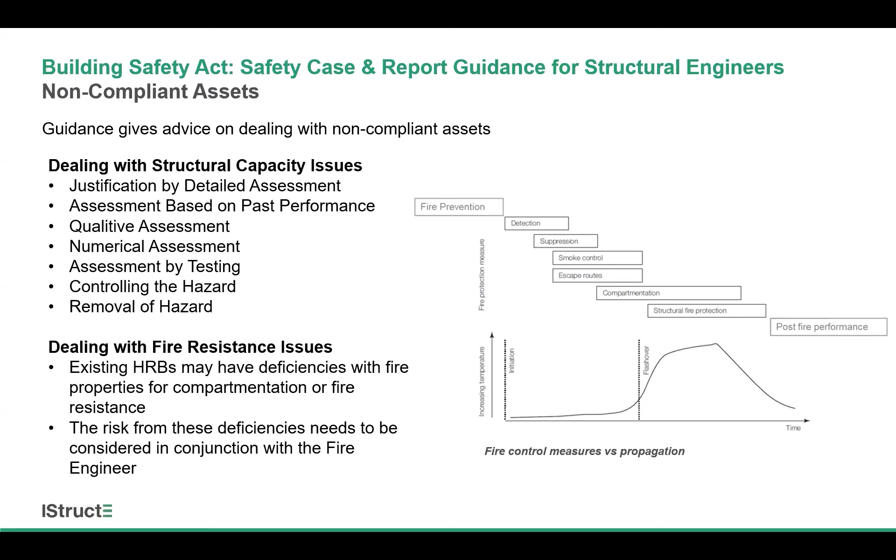Similarly, for fire resistance issues - this is obviously very much been in the press around cladding issues and everything else. As I mentioned, if there are fire resistance issues in relation to the actual structure itself, that can be trickier, and there's definitely a need to interface with the fire engineer to work out how best to address those. It could be as far as actually doing full-blown fire engineering assessment and modelling. It's again just a case of making sure that approach is proportionate at all times.

And considering that proportionate approach, this is the key bit of the Act, and it defines this term, all reasonable steps - albeit it doesn't really define it, it just flags its existence. So what this is getting at is just making sure that you've gone through the process and you've taken the reasonable steps to both identify the hazard, quantify it, to assess its impact and likelihood of it occurring, and as far as it's reasonable, managed it.

So taking that example of the car park column, you could feasibly, if you had question marks over the size of a column, do full-blown analysis, do strengthening, do all sorts of things to try and address the column itself. But that potentially is a kind of overkill way of doing things. Is it easier to work with the principal accountable person to ensure there are speed limits in place, that there are limits on the sizes of vehicles that can enter the car park? Could you introduce some sort of protection to the columns, be it bumper rails or external barriers, etc., and manage that risk in a different way that's less impactful, ultimately less expensive and less disturbing to residents?

The key thing is that you can show that process that's been gone through, and you've taken those reasonable steps, made an active assessment of the risk, and made an active choice to address it in a certain way. That's really what the regulator's looking for. If you've identified a risk and just dismissed it without any real explanation, or you've overlooked it completely, that's where the regulator will start to raise challenges and push these things back.

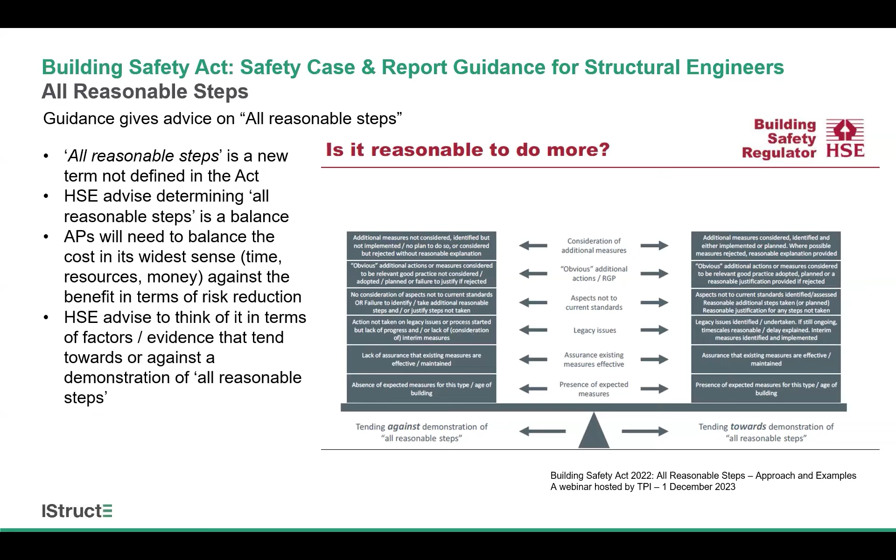And if you've been through that process and identified something that is unacceptable, that triggers its own process. So as an example, if you've done a review and find a transfer slab that just does not seem appropriate, too thin, and you can't readily find a way to justify it, that triggers the mandatory reporting process.

The BSA itself doesn't set a benchmark for what it deems to be an unacceptable risk because it's principles-based legislation. However, SI 907 does give some indication, with two terms. One defines a safety occurrence - an issue that could lead to a risk condition being met, which typically might involve collapse of some or part of the building. The risk condition itself is if that risk is of sufficient magnitude that you fear it could manifest and lead to significant injury of a number of people.

If you hit those two criteria, then that is a mandatory reporting exercise. It would be reported to the building safety regulator, and you would need to work with the principal accountable person to take appropriate steps to mitigate that risk.

So if, for example, it was a transfer slab, it might be that as an interim stage you would need to do some temporary propping to address the concern, ahead of a wider series of remedial measures being developed and put into place.

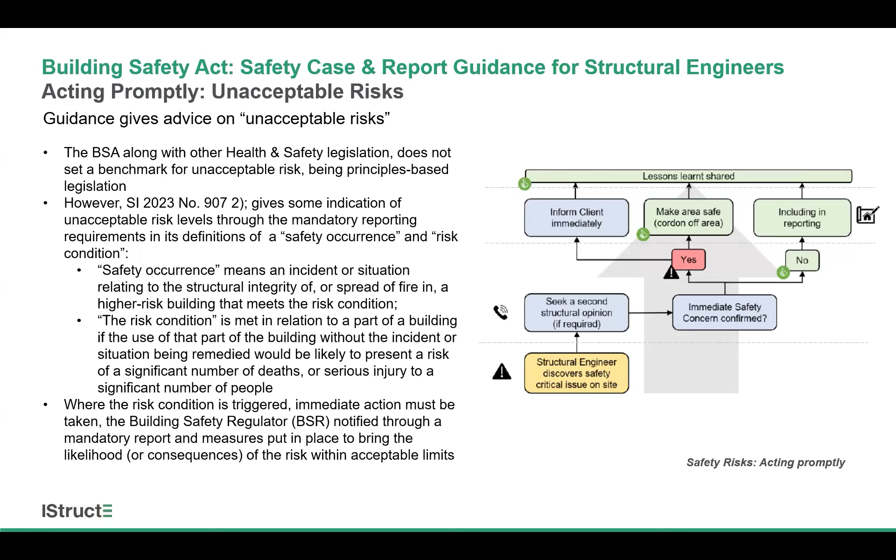That's obviously the worst case scenario, but it's worth remembering that just because a building has been standing for the last 10 years doesn't in and of itself guarantee that it's okay. We've had cases with buildings showing no obvious signs of distress or disrepair, but when you actually look at them on paper and run some high level numbers, you've got utilizations well in excess of 100%. It's just through sheer luck to some degree that they haven't actually manifested in a failure. So definitely don't take the fact that a building is there as proof that it's okay.

In terms of that guidance, keeping up to date, there's an ongoing update of the resources on the IStructE website at the link above. The actual guidance document itself is going through the final check and review process, anticipated for publishing in August. It's available for pre-order at the moment. There will be a webinar that goes out alongside this issue, which will go into more detail about the nuances of the document itself.

I've been talking at a slightly broader level as part of this presentation. There's also all sorts of other information on the IStructE website, as well as other recordings of these sessions. It's very much an evolving understanding, both for IStructE and for the regulator itself. So do keep checking back and try to stay on top of these things, because the guidance and best practices are evolving as we go.

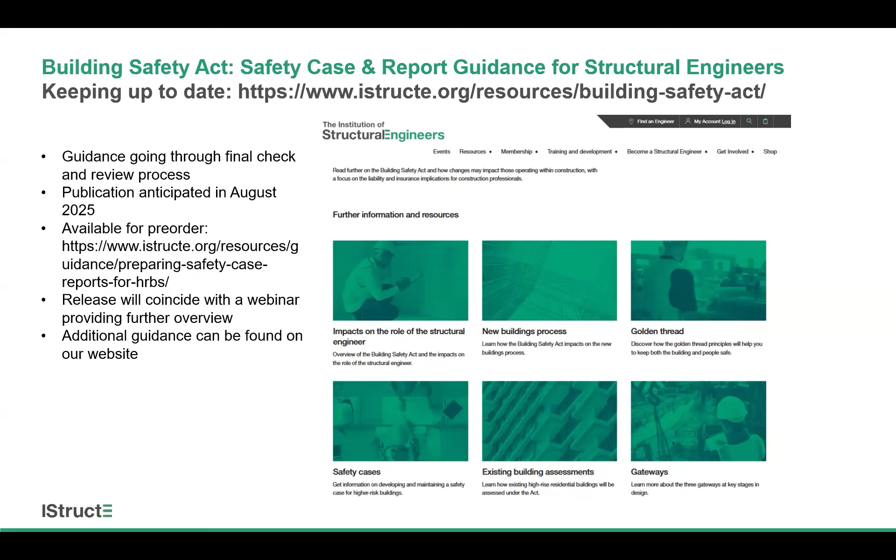As a final point, as Dame Judith noted, true and lasting change will require a universal shift in culture. This is quite a different way of us having to work as engineers. The actual risk assessment process itself isn't new, but often we're doing it in the context of things that haven't been built yet, things we're designing, where we can control and manage those risks through our design. Here, the buildings already exist, so you're dealing with a completely different risk profile and a different challenge.

There is a degree of overlap with what we do for refurbishment, but obviously here it's trickier because we generally don't have the same level of information and we're reporting in a different way. So it's definitely an adjustment. Hopefully the guidance and this talk will give you a bit more of a feel as to what that process needs to look like. And good luck on any future assessments.